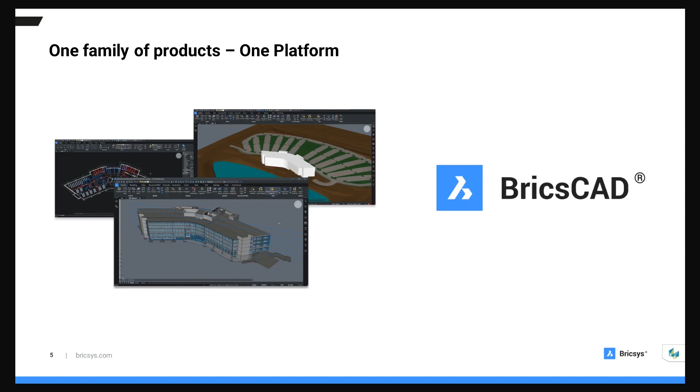Again, based on DWG CAD platform. So regardless of what you're using today, folks, if you're coming from 2D, 3D, maybe doing a bit of BIM, a bit of mechanical design, we've got it all. We cover all of the 2D, 3D, mechanical, and BIM in one application, and that's BricsCAD Ultimate. That's what you get with a 30-day trial.

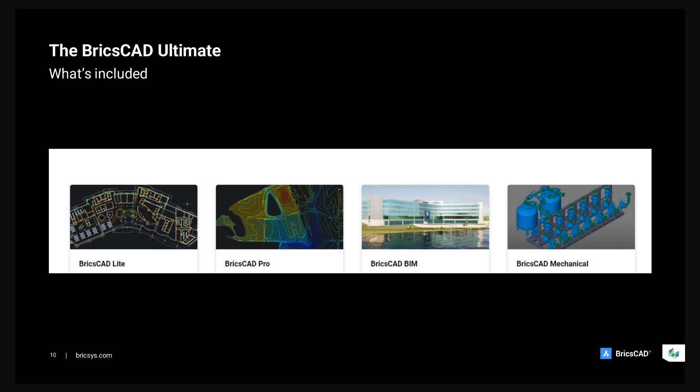So what does BricsCAD Ultimate look like? Now, BricsCAD Ultimate is affordable. If you just look at a low entry, always up-to-date subscription price, it's just over £1,000 for BricsCAD Ultimate. If you would like to own your license, buy once and own it forever, it's just shy of £1,900. And again, both of these, we do support network, multi-user, volume, or single user options as well.

As a side note, if you're a developer or work in education, we want to hear from you. Let us know, request more information, because for you it's free. So do reach out. Now, these prices are great, but...

And they had 20 seats of AutoCAD just to do 2D drawings, 5 seats of a 3D CAD application. It was a mixture of SolidWorks and Inventor - don't ask me why, I've never seen them two sitting in the same business, but they're just different departments. Well, they're using BricsCAD Ultimate now.

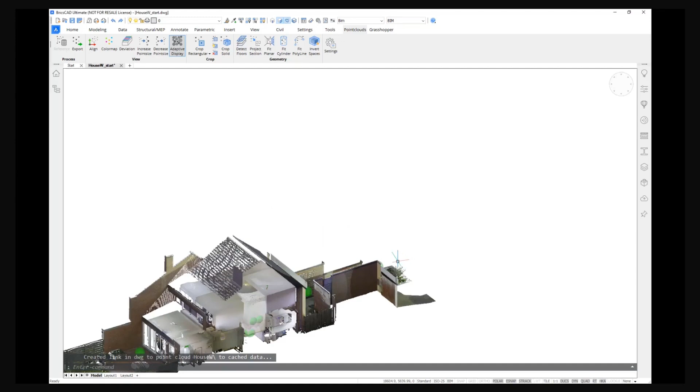Inserting is just like inserting an XREF, and then you can see that the image immediately disappears. As I zoom, less pixels are rendered while zooming, and when I'm zoomed in, more pixels are rendered on screen. We always have a fixed amount of pixels on screen so that you can quickly process even large point clouds.

Then we can see some features, which is increasing the points so that they are better visible, maybe coloring them to the elevation, or maybe resetting the colors.

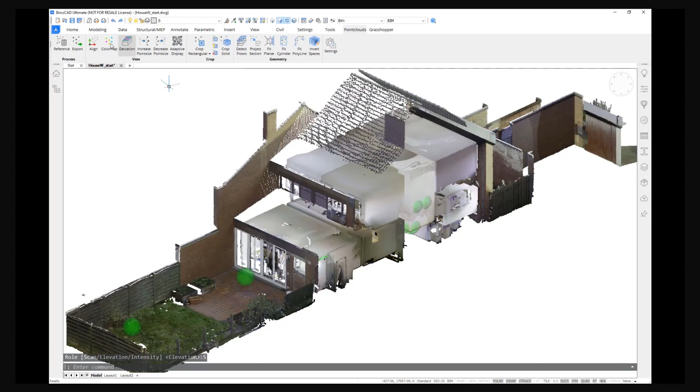to the scan. And then we can also go and align the point cloud. For this, we will be redirected to a top view, because it's needed to select a rectangle in top view. And here you will see that the point cloud is still rotated. If I align the point cloud based on a selection that contains a lot of XY aligned walls, you will see that the point cloud aligns itself, which is better to work with afterwards.

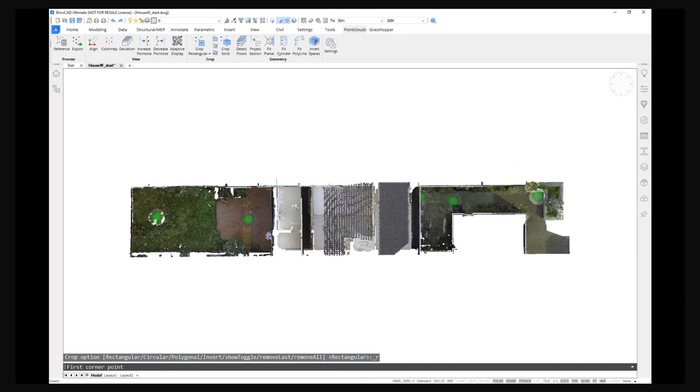Then we can also crop the point cloud, either with crop solids or with just our regular crop tool, and then we can leave, for example, only the inside visible or only the outside.

So what I want to show you as well is detect floors. Detect floors will detect all the floors in a point cloud, and here it found 2 floors, and now I can quickly clip through them just below the ceilings.

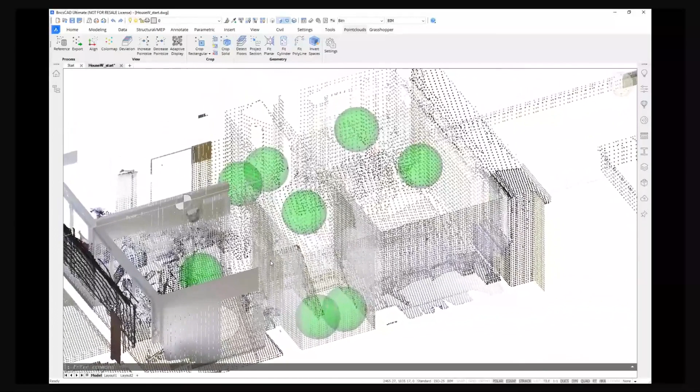And then especially in BricsCAD BIM, we have a feature which is the bubble views. If you have a structured point cloud, you can open the bubble views - those are the green bubbles. If you don't want to display that, you can change it in the properties of your point cloud. But here, if I double click on a bubble view, you will see the scan position from where the scan was made.

And from here we can launch Fit Planar. Note that the Fit Planar is a command special to BricsCAD, and it allows detecting walls by finding a plane of common points inside your drawing.

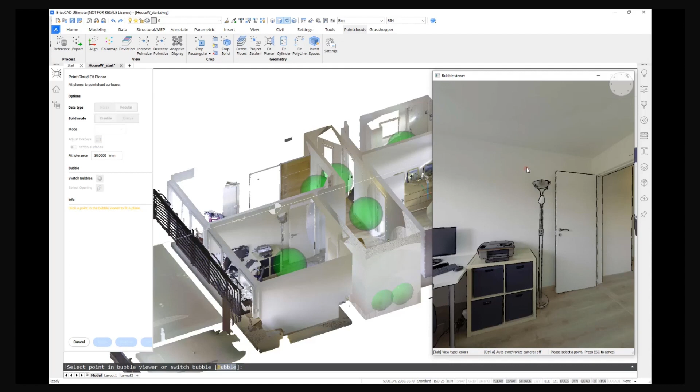And you can do this if you launch it from Bubble View. You are expected to pick a point in Bubble View, and you can, for example, pick the ceiling, or maybe not the ceiling, but here the wall. Then you will see that a plane is immediately created, corresponding to have as few outliers as possible.

So that's one thing, but if you now hold down shift, you can quickly trace over the entire room. By holding down shift, you are actually stitching all the surfaces in the room together - well, not stitching exactly, but making sure that they are nicely connected.

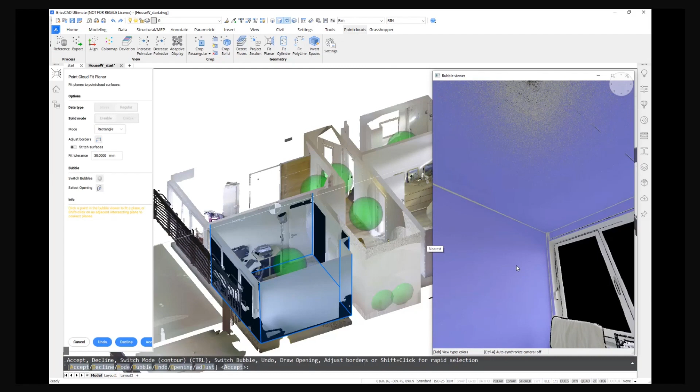And as soon as I have all the faces of the room selected, I can select the opening still. So here we can detect a rectangle that will denote the opening in the point cloud. So you see that here a rectangle was made, and we can do the same for the other side, like that.

And then you can either choose to stitch the surfaces or not. Stitching the surfaces will make sure that they come into one big solid. If you don't stitch them, don't worry, we can do that later, as I will show you now.

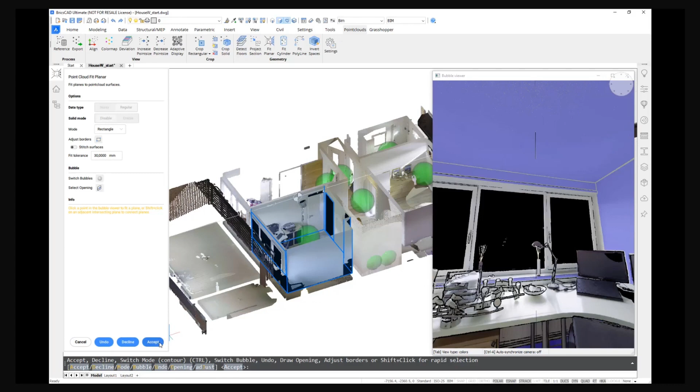But for now, just accept the defaults, and you see that now if I hide the point clouds - so I can cancel the command and hide the point cloud - then we see that we created a room solid. Still, the color might need to change a bit so that it's better visible, and we also see the rectangles that were created.

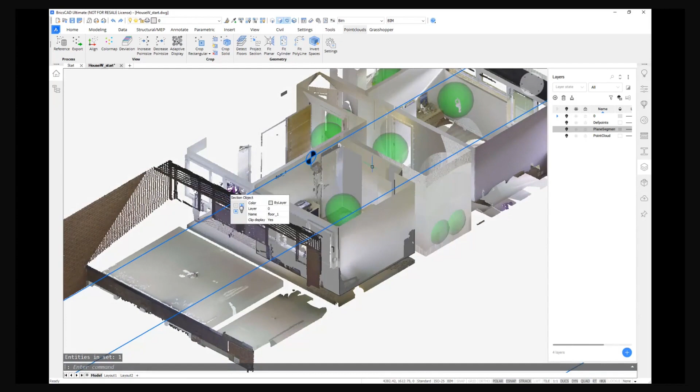If I don't crop my view, you see that the entire solid of the room is made as is. So the walls are also a bit slanted in this case. Then we can do the same for every room in the house.

Once we open the bubble view, we can launch Fit Planar again, and I can do the same for the next room. So maybe start with the ceiling in this one, then just go over all the walls that we see, and it will make a suggestion.

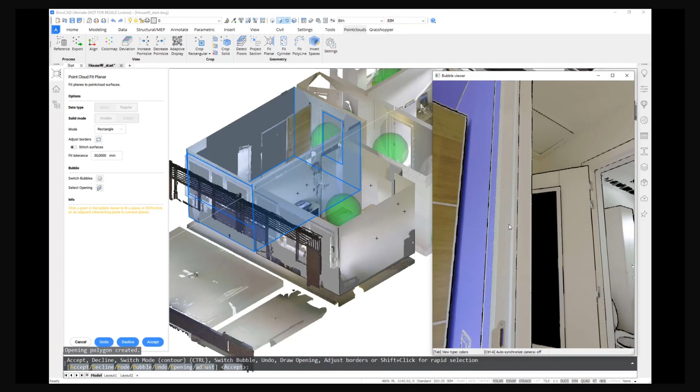Then detect the openings with select opening, and select the door opening still. Okay, and then I can accept and cancel the command, and now I will have 2 rooms.

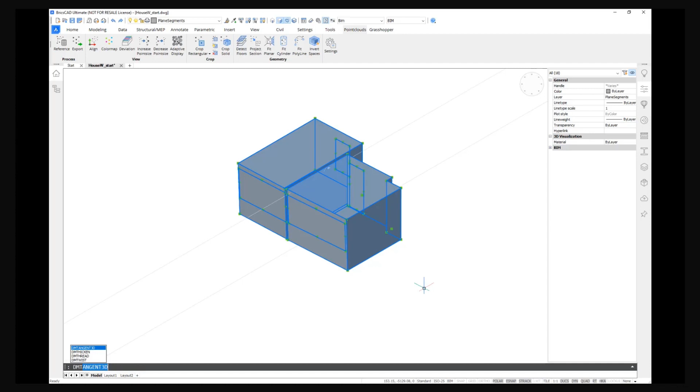As you can see, at the moment they are just faces or surfaces. If we want to stitch everything together, it's best to select all the surfaces and then just call the command dm stitch. Then you will see that now the rooms are actually turned into solid, so you cannot see through them again. So I like to do it at the end.

Now what we are going to do is skip to a model where all the rooms are made, so I will open the next file. Here you see the point cloud with all the walls modeled. But if we look closely, this is just the result from Fit Planar on every room separately.

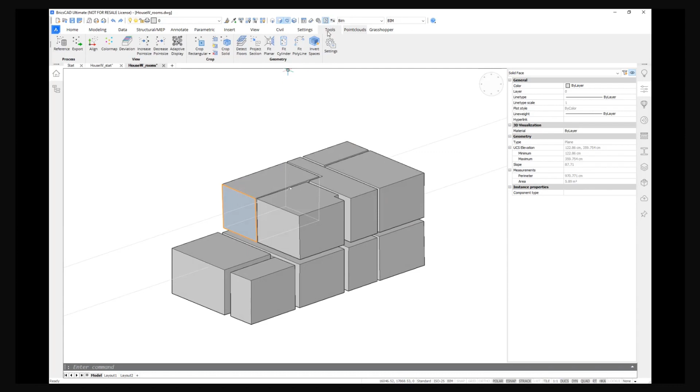If we look closely, we see that here the slopes aren't exactly 90 degrees, so here maybe it's 87.7 and so on. Now there is a command that can help you optimize this, and it's called just that: Optimize. It's a BricsCAD specific tool that will rectify your faces, or your 2D entities if you would do it on 2D entities.

It will rectify them based on the XY, YZ and XZ planes, depending on what you select here. It will make faces that are almost coplanar, and round off the values of the distances to a rounding precision of 1 millimeter. In this case, you can also select more.

You can also add a distance tolerance to determine when two faces are coplanar. Here I will make that only 50, so that our interior walls aren't mapped to one face, let's say. And the angle tolerance I'm going to put a bit higher, because we have quite some slanted roofs that I all want to rectify.

Then we can press preview and see how it's being rectified. If we're happy, we press OK. And now if I select the same face again, we see that it has a slope of exactly 90, and everything is nicely coplanar if you look at the nearest distance, for example.

So that's needed to be able to use the next command, which is back in the point cloud space: invert spaces. It's literally inverting the spaces so that it becomes the house geometry instead, so the walls and so on.

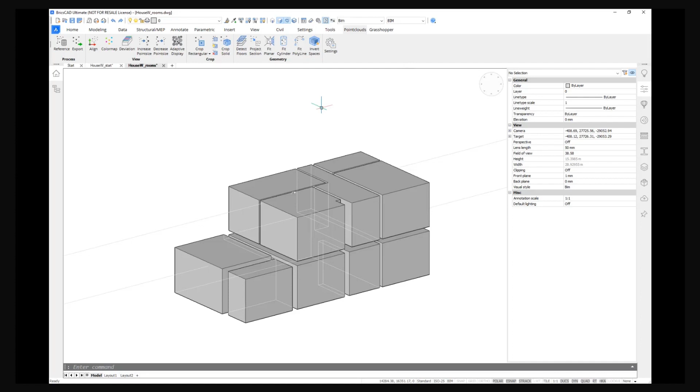And if we invert the spaces, we can also see some settings. I will leave most of them untouched. You can erase your input solids in this case, it's a bit easier so that you can immediately see the result.

And then here we can create a single wall shell, which makes sure that, and we can slice this single shell per floor and split it into separate pieces so that it becomes ready to use as a BIM model later on. So I will click apply, and here you will see the values, the thicknesses that weren't specified, just by having adjacent rooms.

So the outside shell, let's say, and then I will just press apply, and you will see what the algorithm does. It makes sure that the spaces are inverted and everything stays as you wish.

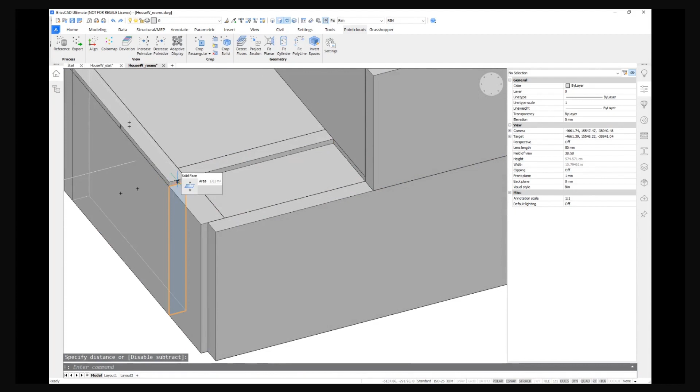So yeah, you might need to do some direct modeling to clean up this side, for example, and maybe do some more direct modeling with push-pull to make sure that it's more like an actual building would be built. So you can direct model as much as you want, but you can see that the elements are already nicely created.

Now note that normally invert spaces will also already give you the BIM properties, so it will already classify the slabs into slabs, the walls into walls, as you can see here. But for the sake of this demonstration, I will use an unclassified model and classify it from scratch a bit later on, because we also still had our rectangles that I can show again, here, the openings that we created before.

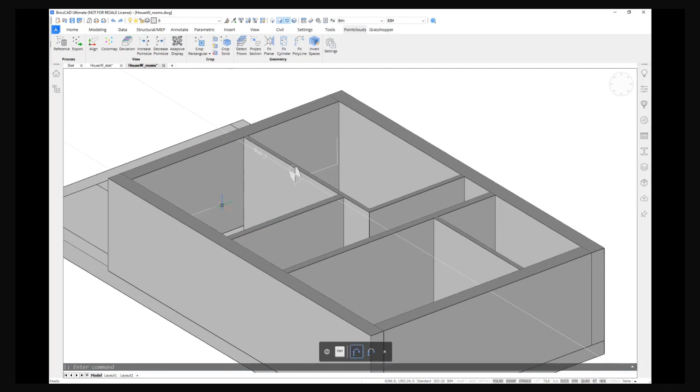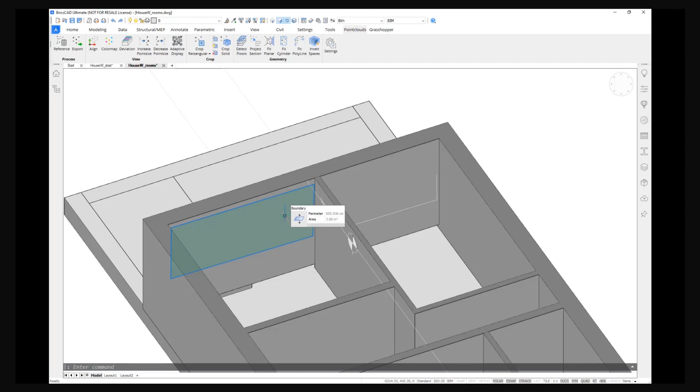Note that these will not be rectified together, so you will need to project them with the project geometry command onto the surfaces of the walls. You can use some perpendicular snap to quickly get the job done. I'll go from the corner of the rectangle to the perpendicular plane, and then you'll see I can highlight the boundary of this opening.

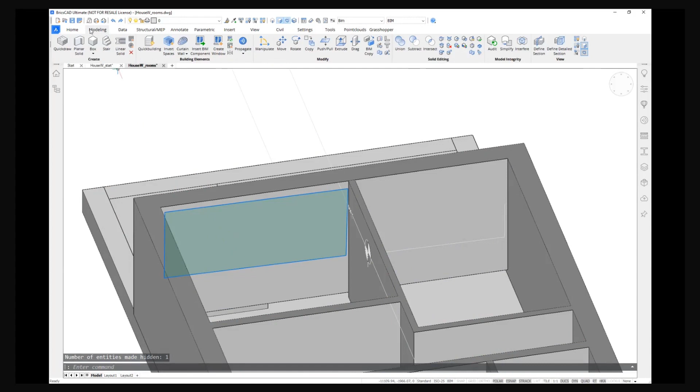Let's see how the window looked again. As I can see here in the point cloud, it has like 3 panels. So I will recreate that by using the tool called create window with the option style of 3 panels. Now I can still change the parameters to fit my design better.

For example, if we want a very small window - but here it was approximately like this, I think. So that's how we can trace over our components, and we can also insert some components like the doors from the component library.

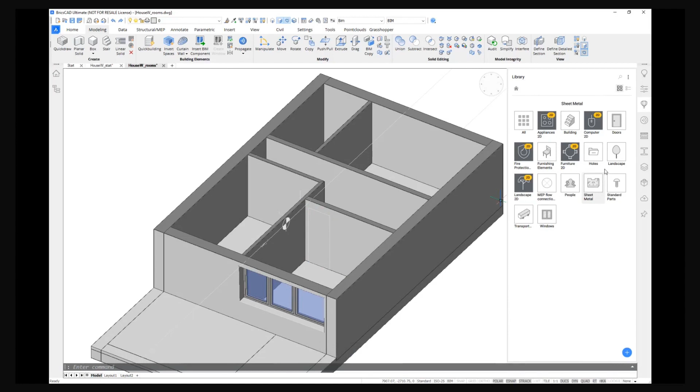We can base the parameters on our polyline. So here we can go to doors, insert the door, and then change the parameters so that it fits this frame nicely. We can then see what this distance is - it's 740 - and give this distance here in the width. Our width is already approximately what we want.

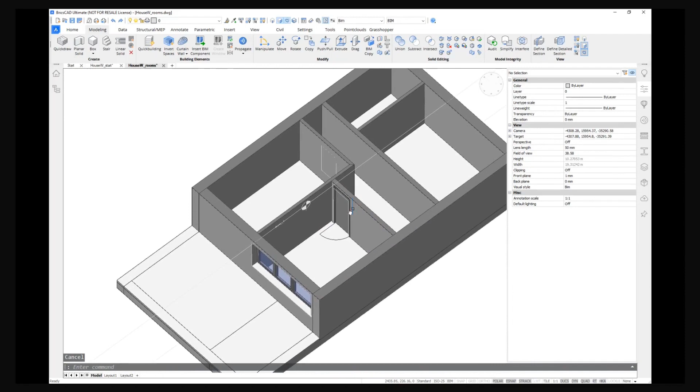As such, you can trace over your point cloud, doing this for all the openings you created. But we will not wait for that - we'll go further with the next prepared drawing, which has all these components already inserted. If you look closely and I hide the point cloud, you'll see all my doors, there's a stair. But maybe your classifications weren't correct right away, or maybe you added some extra geometry.

Now we are going to use Bimify. Bimify is a BricsCAD specific tool that allows you to convert dumb geometry into smart geometry, into BIM geometry. So that's where we will go.

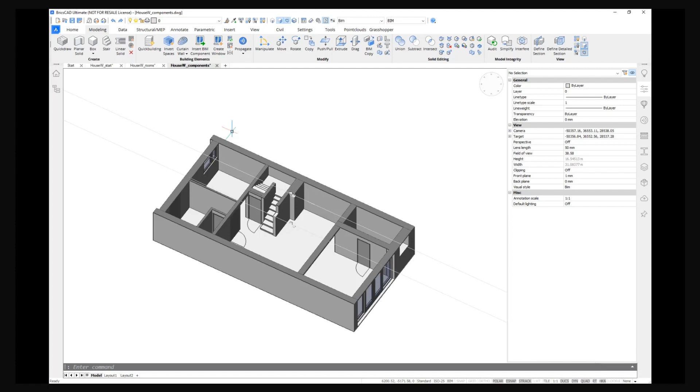Here we will also see that you can classify anything as anything in BricsCAD. You can, for example, first select these two solids already, the roof solids, and classify them as roofs - that's one way to go. Or you could do that after Bimify if Bimify made a mistake. But if you do it before Bimify, then Bimify will not overrule this.

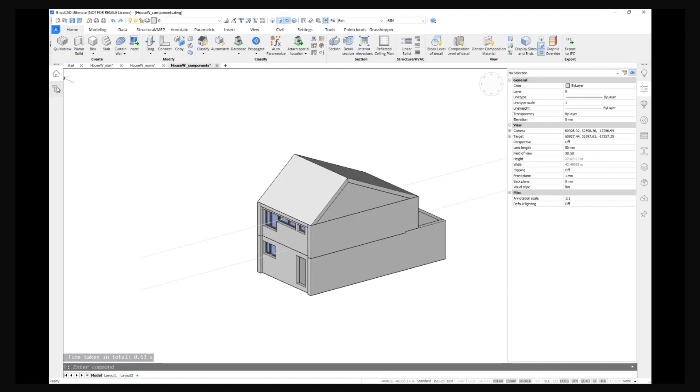That's very convenient. If I now launch Bimify, let me show my structure browser first so you believe me that they are just 3D solids, except the two roof panels which I already classified. If I now do Bimify, you'll see all the options. I will not create sections this time because I already have the sections I need. Then I apply everything, and here you will see that now we have all elements classified and assigned to spatial locations.

If we orbit a bit to the side, you'll see floor 0 looks pretty good, floor 1 also looks pretty good, floor 2 also looks pretty good. The roofs which we classified before are still roofs. If we look a bit more, we see the walls, we see the slab, we even see a beam - same for the lower levels.

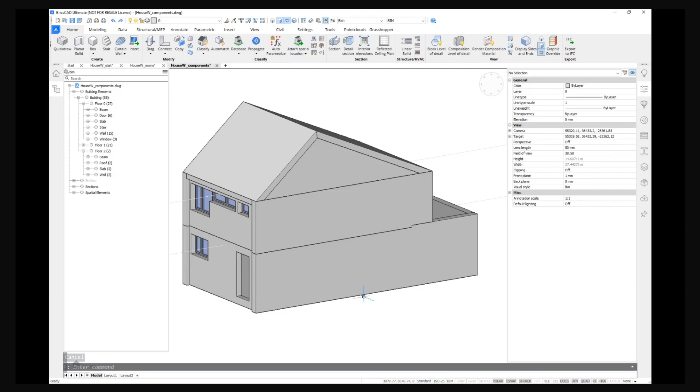We see the doors, we see the windows. Everything gets classified just from dumb geometry, just from block graphs and 3D solids. That's pretty nice, I hope you also enjoyed that. Then what we can do, of course, is check if all the properties are correct. We can also set some extra properties like the name.

We can easily define different grouping types in the structure browser. There I can, for example, select all my walls and give them the name wall, or you could specify the outer walls versus the inner walls, or give them a coding name depending on what you like.

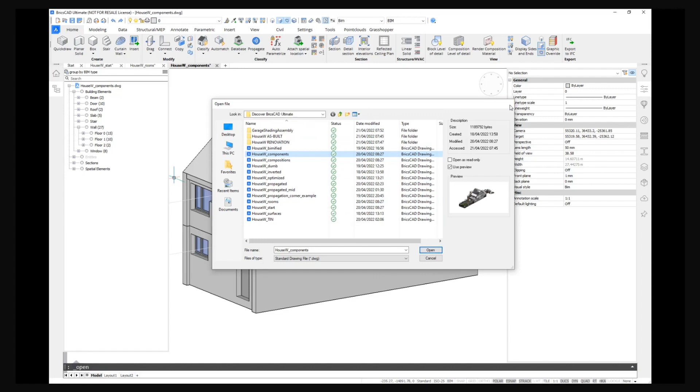Okay, then finally I already added some more information. Also what we can do is add some compositions. Here I can filter by composition, but if there is no composition, I filter by thickness of the walls. And here you see we have some 100mm walls, but also lots of different values that are almost 100mm.

So what we can do is define a composition. We open the composition dialog, choose for example the drywall, copy it to our project, and say that this one has 100mm thickness. We change some of the thicknesses of each layer, so for example you can change here to 75. And then we see that the entire thickness is now exactly 100.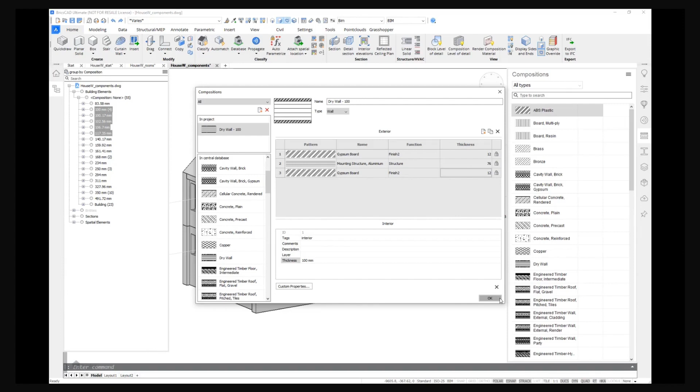What does it mean if all the locks are on? It means that your previous thickness will be matched to exactly 100, and normally the walls stay nicely connected if possible. So here, for example, this L connection will be maintained.

We can show you that by now going to only our compositions in our project and applying the drywall composition. You need to select the reference face from which it applies these compositions. Then you can see that the L connection is maintained as good as possible, but we might need to L connect once again to clean up the corner.

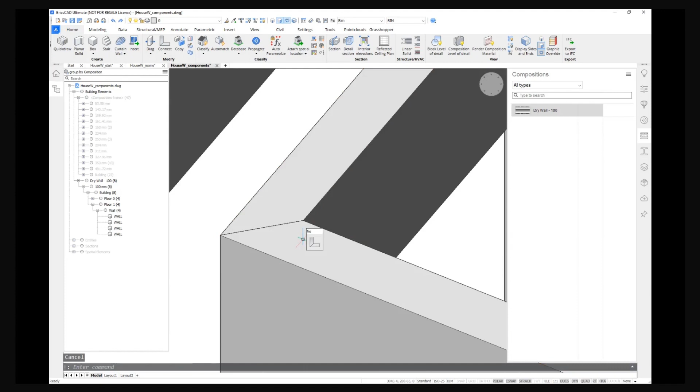Same here, so as such you can easily make sure that all your compositions are correct. It might not look like much, but actually we have here a composition attached. And if you look closely, if we put on the level of detail, we also have the different plies here, so that's very interesting.

We could use auto match to automatically—if you have one example of everything—make the entire drawing according to your compositions. But here I did it just by selecting the correct thicknesses from the structure browser and applying the composition I made to it, so that it becomes all clear and correct thicknesses.

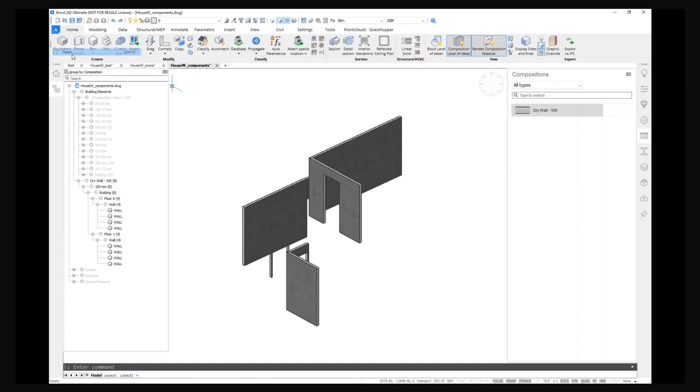And I did that in this drawing, so here we will see the entire drawing where some compositions have been made. And you will see that now not everything is looking as I would wish it. For example, if I look here, my level of detail isn't that great yet because my bottom is not structurally sound. My structural element is not connected to my concrete slab.

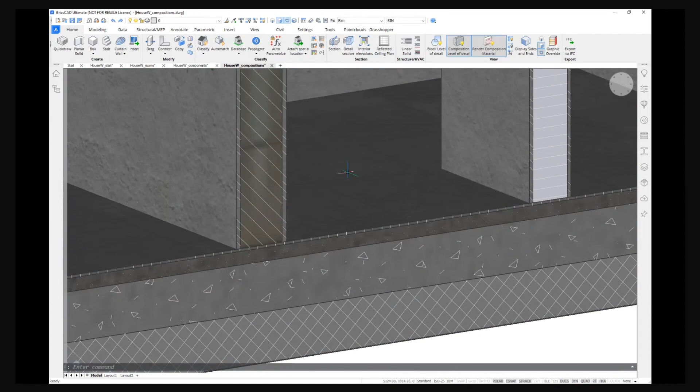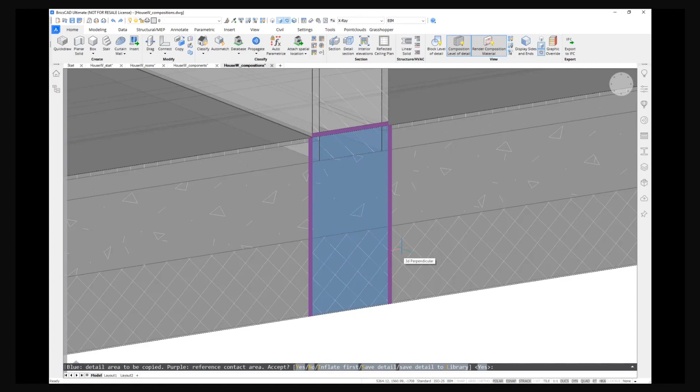So I can still change that. If composition level of detail is on, you can push-pull certain layers, and then we can propagate this element to different locations. So I select both solids, and then I select no base solid for now. Then I see, okay, these two walls will be propagated, or this connection will be propagated to other locations where exactly this type of wall and exactly this type of slab is also found.

And as you will see now, it's not in that many locations—we can see it's just in a few locations of the same wall, basically. So you could accept this, but I will cancel it because we have a far more interesting element, which is the details panel. In the details panel, you can actually store your details. So while you did propagate, you also had the option to save your detail to the library. That's what I did, and then you will find a similar connection here—the wall slab connection.

And then here you will see that I have this inner wall, and then I can click Parameterize to parameterize this detail. Then actually everything will be parameterized, and the entire detail will be mappable to locations with exactly the same amount of plies in their compositions, but with varying thicknesses of the plies. So the only prerequisite of finding a similar location is the amount of plies.

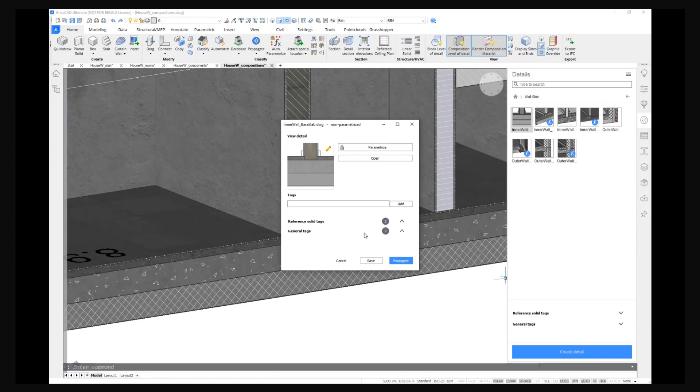Material thickness of the ply doesn't really matter. And if we have parameterized it, it's just like this one here. You can see that we have some tolerances. The angular tolerance is how tilted the wall can be. The thickness tolerance is how thick of a varying thickness we can map it onto.

And then let's just see it in action. So first of all, note that here none of the walls have been done yet. Then I can just drag and drop my detail in there and it will calculate for me all the locations. So maybe I don't want it at these locations here.

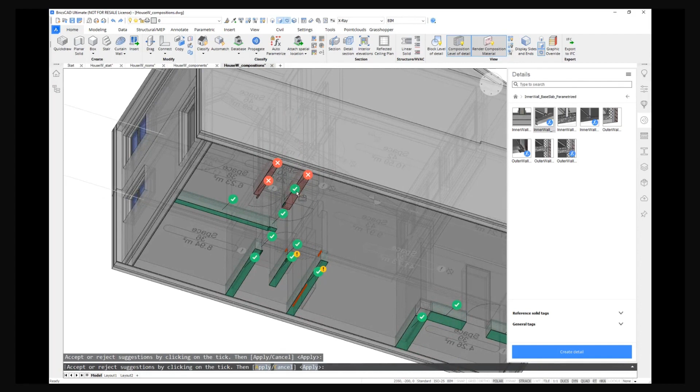I don't want it here at my toilet, but I want it in all the other rooms. So I say apply and let's see what happens.

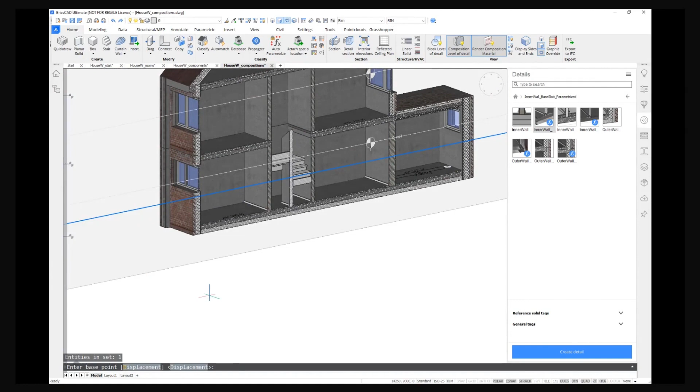The detail was applied to every other location. Note that we also had some extra details in this parameterized detail, which also has baseboards. So as such, you can easily propagate baseboards all the way into your entire drawing, and you see that here was also made. But if we look and move our section a bit, we'll see that in the area of the toilet, the details were not applied.

That's super great. Now it's time to show you the final BIM model result. It's an as-built model where I've also attached a TIN surface for the front garden. I can show it to you in the attachments panel.

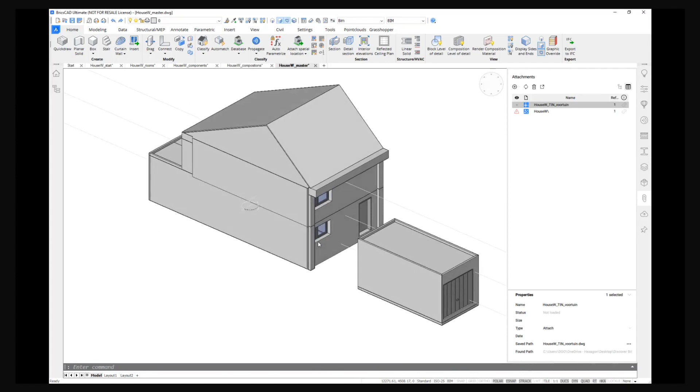This is the entire model with the garage also modeled. Then I can hide my point cloud. You see the model is very nicely detailed. Also, if we look through the cut-through section, all our details are modeled as I would wish them. There are baseboards everywhere, and everything is classified nicely. So we're very happy at this point.

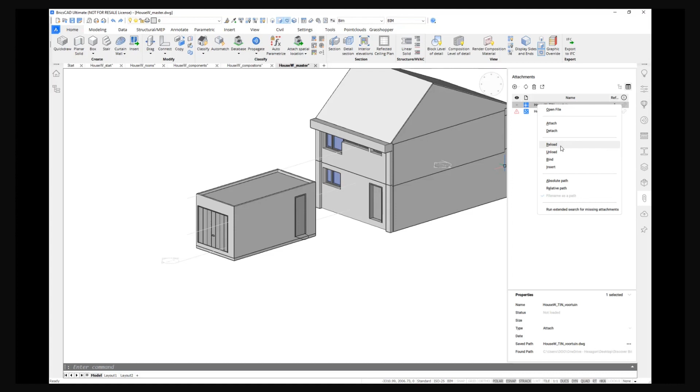I just want to show you that you can also use civil surfaces, so TIN surfaces from BricsCAD Pro, in BIM models. So you can reload, and then you can see that the TIN surface is now attached.

It's a bit faint, but that's a setting. Here you can see even the pavement is visible in the TIN surface, so it gives you an idea of how the surface terrain is going outside.

To make the sections, it's best to unload your TIN surface, otherwise it might take a little bit of time.

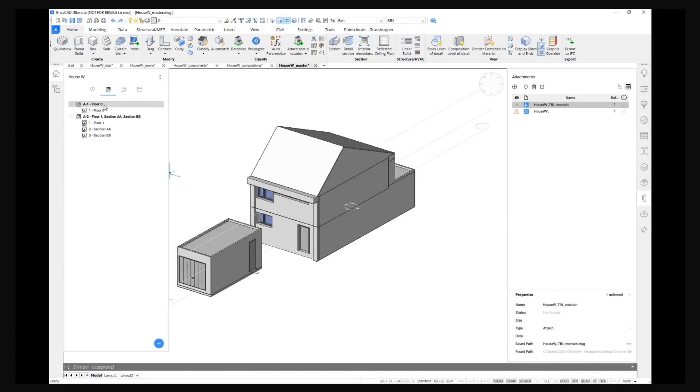So here we have now a BIM project really with some information such as our company logo, our project name, and so on. We have, of course, some sheets. These sheets correspond with the section objects that I have in my drawing. And then we see all the sections and all the files that are in our project.

So let us open a sheet. Then you can see that I also used point cloud project section to give a nicer infilling of my room based on my point cloud. The point cloud gets turned into a raster image from that section plane, and it allows you to see, for example, where the furniture is placed, even though I didn't even model the furniture. Then we can also open a cross section here.

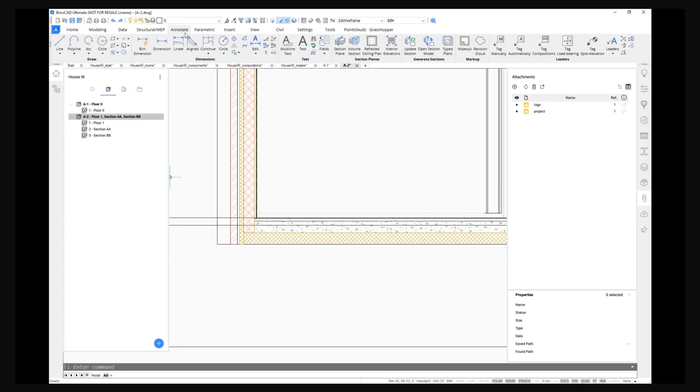So here we have our cross section with nice details. We can, of course, annotate some things such as the tag composition. You can tag a composition here - that's one element, that's the facing bricks.

But you can also say, okay, we need the entire thing, because this is just the pillar at the end, which only exists out of facing bricks, but here our entire layout of our wall is given, maybe also from our floor. Maybe do some spot elevations on the stair.

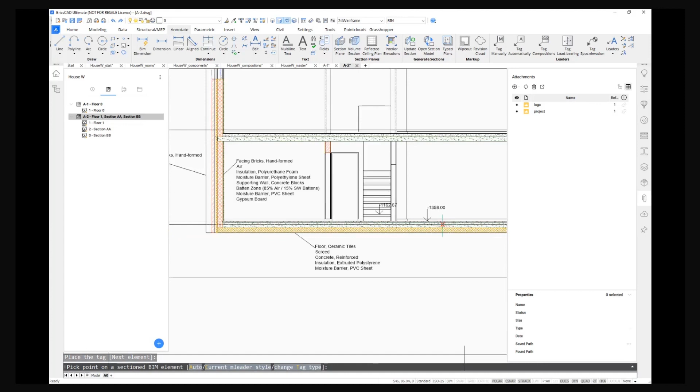So we say, okay, this one is that high, but maybe also here we see the spot elevation of the outside, and here of the floor.

You can of course also dimension some things, such as the height of the beam, or all your walls and so on. We also have a new command, BIM Dimension, which is possible to use on top of our generated sections.

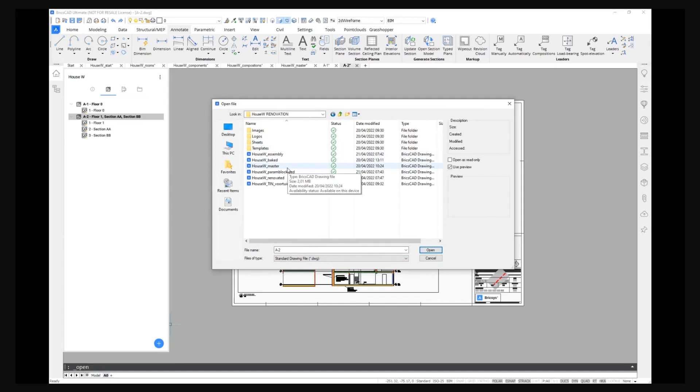Okay, so that is our scan to BIM, but now our renovation part still. We want to open our master file once again, but I just made a copy so I can do some renovation work in here. Basically, I want to renovate this garage shed in the front.

So I delete or put these elements on the status. You can put them on the status demolish, for example, to make sure that these components are going to be demolished. But for now, let's keep it simple and just delete the elements, or maybe just the components, so that we can see the wall still.

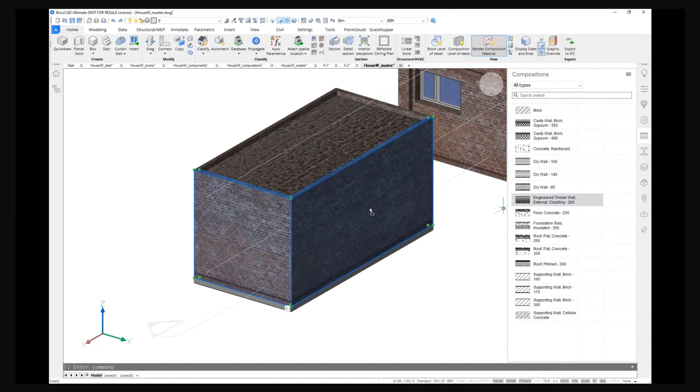So now we have just a plain single layer brick wall, if you turn on the compositions. But we can also make sure that it's a new composition, such as the engineered wall, so a wooden frame wall. And then we can see how it would look.

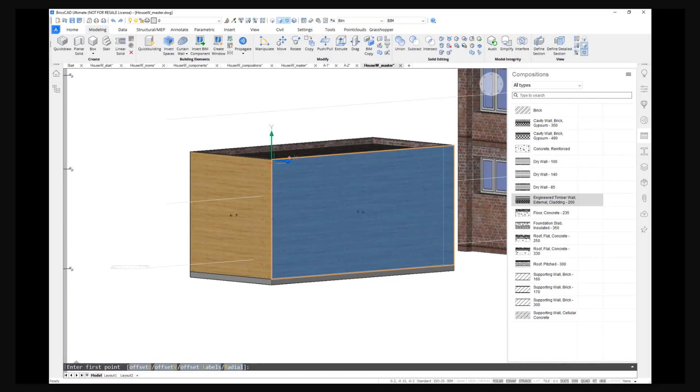We can maybe design some BIM grids just for you to see. So I will start here. I will say 0.5 onto 0.8 maybe. Okay, and then I have my grid. Then we can move this block a little bit.

And then I can make a window out of this grid, and I can delete the grid afterwards, so that it becomes nicely a nice model.

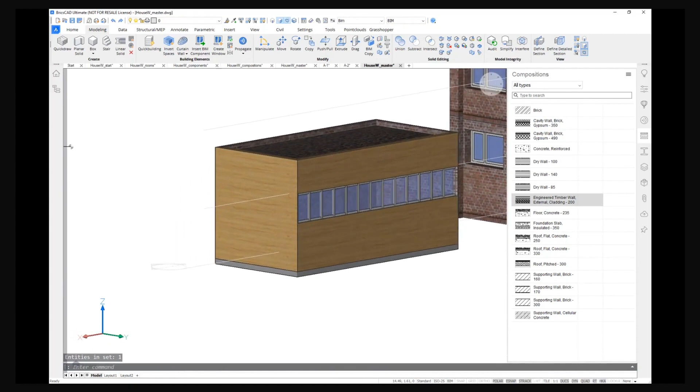And here for the garage door, I have a very special request. I want to have a special garage door, which is also going to make a shading. And for this, I will turn to my renovated house, where I already prepared this.

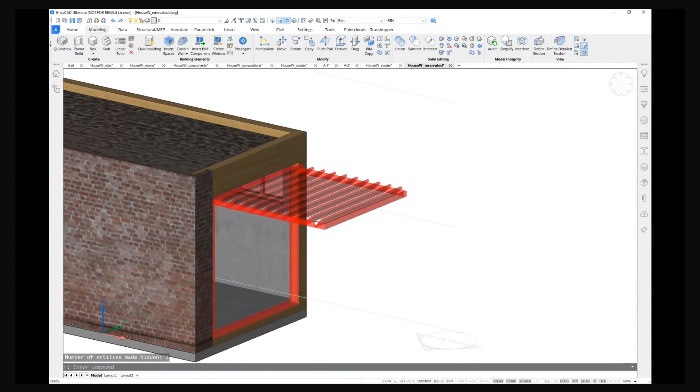So you will be able to see what I mean in just a bit. So here we have actually attached a Grasshopper file to a 3D solid. I can hide the point cloud, and then you see actually what type of garage door I want. I want a garage door which has these shading elements that also turn into the garage door panels. And we can change this entire thing, because it's now just a Grasshopper script.

If you have the Grasshopper plugin, you can also clear the data, and then it will turn back into a regular geometry. But if I attach the Grasshopper script again, then you will see how it looks if I close the entire door, and then you can still rotate, for example, only your panels 45 degrees, or maybe the entire shading 90 degrees.

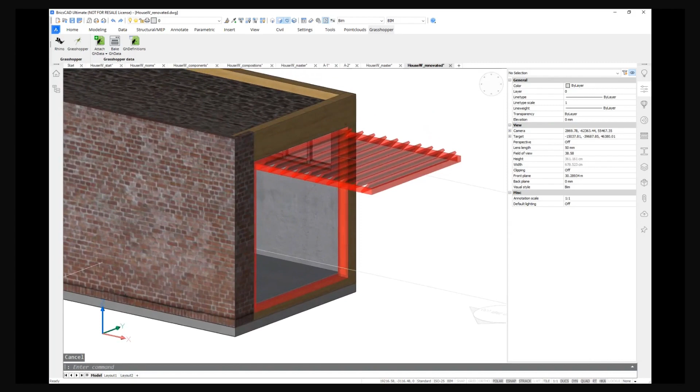And this is like the type of garage door I imagine, just a pre-design very roughly. But now we want to fabricate this, of course, because this is an ultimate webinar.

So we are going to do design to fabrication. How am I going to do that? Well, I can bake these Grasshopper elements, and I can actually just start off from there. So I can clear the Grasshopper data on this element so that we only see our baked elements.

So this is my pre-design. I hope you also agree that it looks kind of fancy. I will want that as a garage door.

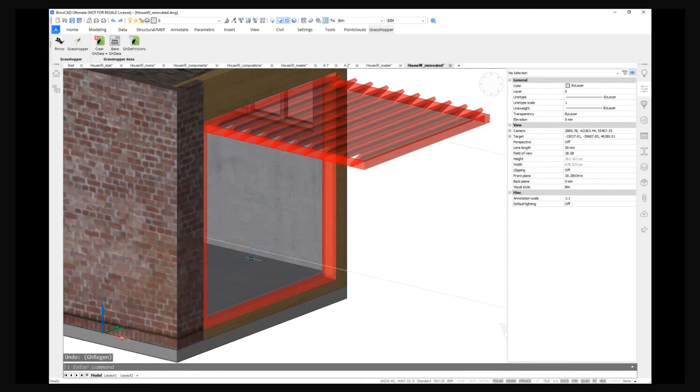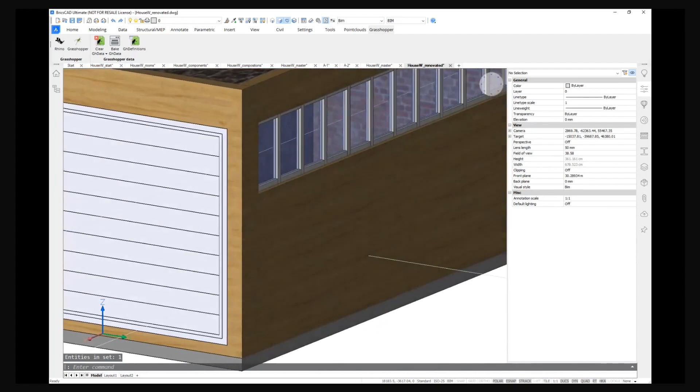And then what I can do is, maybe it's better if I bake it also when it's closed, of course. Then it will be a bit easier to model with. So I just undid a few steps. I'm going to bake everything and then clear the Grasshopper data from this element and delete that element. Yes, and then I see my garage door, which is closed, which will be a bit easier to work off.

But note that if we classified elements into our Grasshopper script, this will also become here the correct classification type, and you can define this into your Grasshopper script. So for example, here the framings I made members. So yeah, that's a cool trick from Grasshopper.

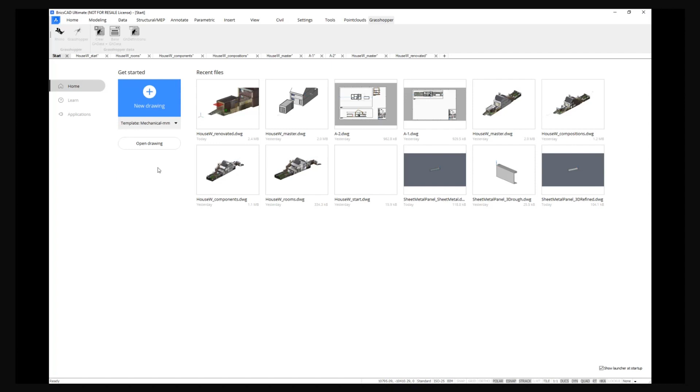But here, let us take this assembly and just copy it to a new drawing. So let's start in a mechanical template now. Oops, that was the default template. Mechanical, yes. All right, let me just change my background.

Okay, so we have here a new drawing, and I can copy paste my block there. Now it's maybe better to move it so that this becomes our 0, 0, 0 point.

Yes, and then we can actually start by transforming this into an assembly. So how will I do that? Well, it's actually quite simple. First of all, I will delete the repeated panels.

Then, you could also use parametric blockify for this, to find all the parametric blocks and define them all into one type of block. But here I choose to just start off from the bottom beam and then block everything.

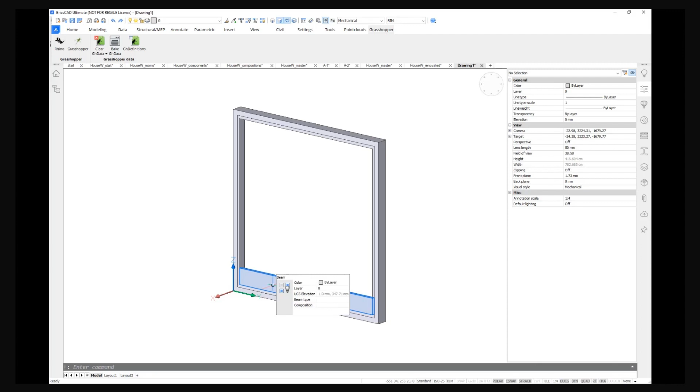But first, let me change this so that I can parameterize this entire beam. So first I will switch to the mechanical space, and then, as you can see, nothing is parameterized right now. But if I go to auto parameterize, you will see that these elements get parameterized.

We can delete the fixed constraints for now. And then we can see that we can actually animate this length, for example. So now it became parametric.

We can then BM form this or just block it. If you block it, it will become a parametric block. If you BM form it, it will become a component. So we can actually say that this is the panel.

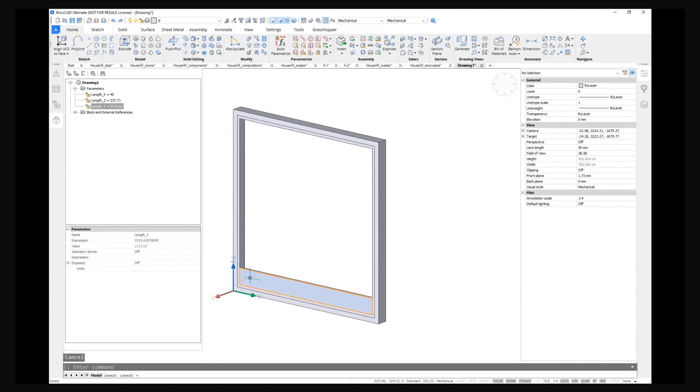And then here we can say that this is a block reference. So this is not an assembly yet because it's just a block reference, and assemblies need components with a little bit more information, but we will see how we can turn blocks into components later on.

So here I will do the same. I will auto parameterize, delete the fixed constraints, block it to inner frame, pick on screen. Yes, so we now have here a block reference again, and I will do the same for the last frame, the outer frame.

Okay, and then I will block it to outer frame. Now I have something which is not yet an assembly, it's just some block references. How do I make an assembly out of it?

Well, very easy. You go to Assembly and say Initialize Mechanical Structure. If you have a drawing with blocks and blocks and blocks, it will initialize a mechanical structure right from it, converting all the blocks into components. You see this little icon change, and now we have a component with extra data attached.

Then we can link all the parameters so they are controllable from the outer element. So now we can say length X. You can see what changes here. And then finally, you can have an assembly that's entirely parameterized.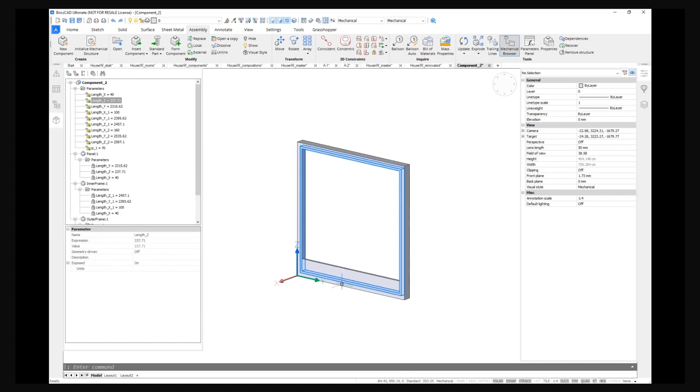But that's not enough for me. I just want to create this. Of course, you could array this block upwards first, but I didn't do this now. That's just a matter of an array command.

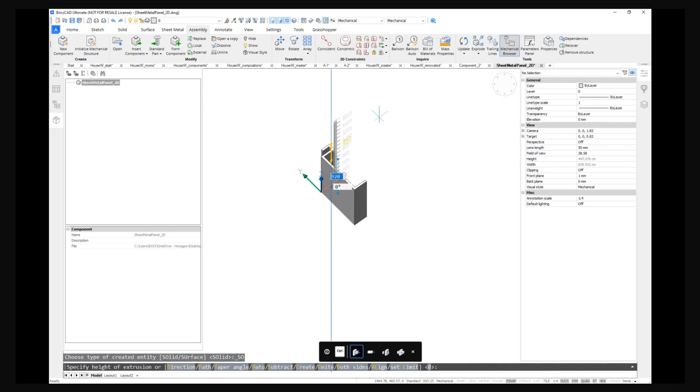But before I do that, I'll show you that I can also turn this panel into a sheet metal panel. For that, I'll start from a 2D drawing this time. So here I will say the 2D drawing, and then I can very quickly extrude my polyline so it becomes a beam, and then from here turn that into sheet metal.

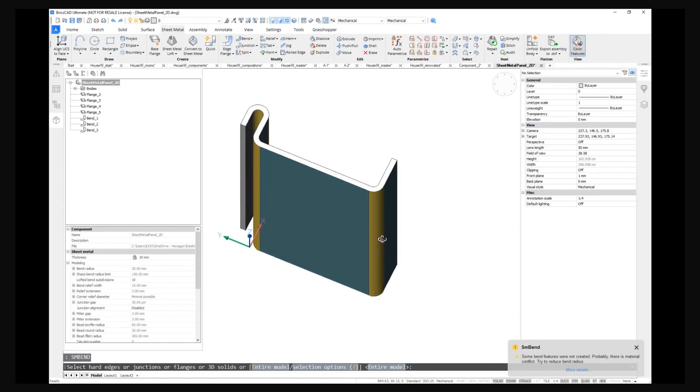It's very easy. You convert to sheet metal your flat element, say entire model, and then my entire model is now sheet metal, but it's not really fabricatable yet as it doesn't have bends. But that's also very easy - you say create bends on entire model, and we have all the bends that we need.

Let me switch to where I also have a 3D model of something which is almost sheet metal, but not quite yet because it doesn't have this blue color. You can also convert something already entirely fabricatable, maybe made in another program, imported through STL, whatever - you can turn it into sheet metal in BricsCAD.

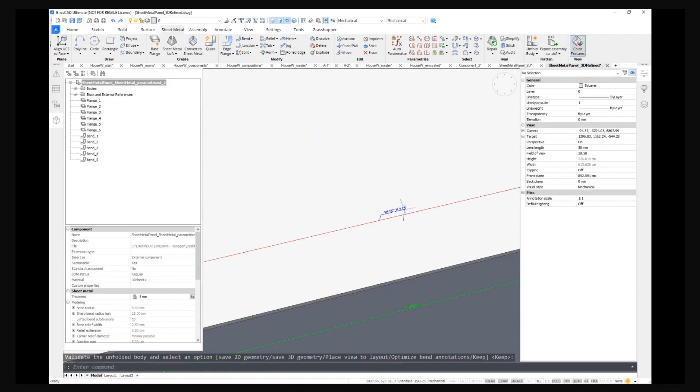And the power of sheet metal in BricsCAD is that you can unfold your body. You can make an unfolding very, very easily, and then see how that turns out with all the bend radiuses applied and so on.

And then finally, I added some extra elements here - I added these holes, but as you can see, I also added something else: parameters. You can also do this, but you'll probably need to add some extra manual constraints.

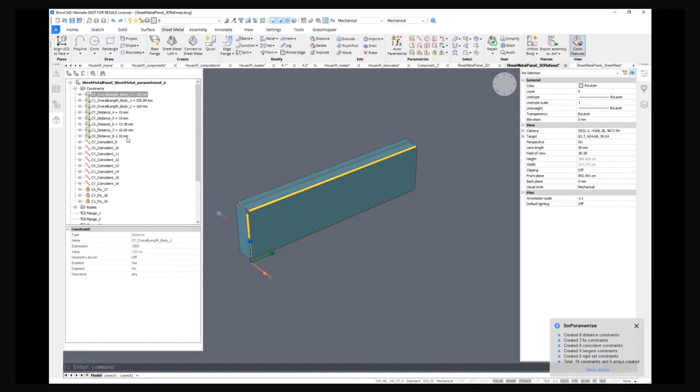If you go to the Sheet Metal tab, you have Sheet Metal Parameterize on the entire model, and then you can see that we can control the overall length very easily, because the entire sheet metal part is parameterized right now. Maybe you'll need extra constraint placement for complicated parts, but in general this gives a good base for you.

And then we can have something like this where we can animate the entire length, the entire height of the elements - our holes move along. We can animate the thickness. And why is this so important?

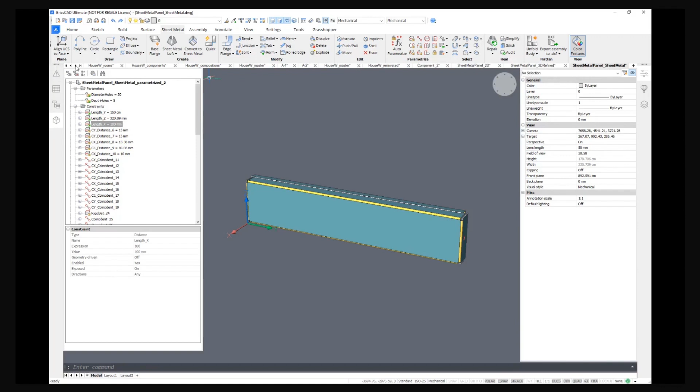Well, at this point, if I can actually replace my assembly with... so I will open this assembly, so I can have my assembly, and I can replace this.

That was not the one we were working on before, but let me initialize the mechanical structure here once again. So here we have all the panels again with all the parameters, so we can link to parameters once again. And then we can replace from a file - we can replace from the sheet metal part we just created.

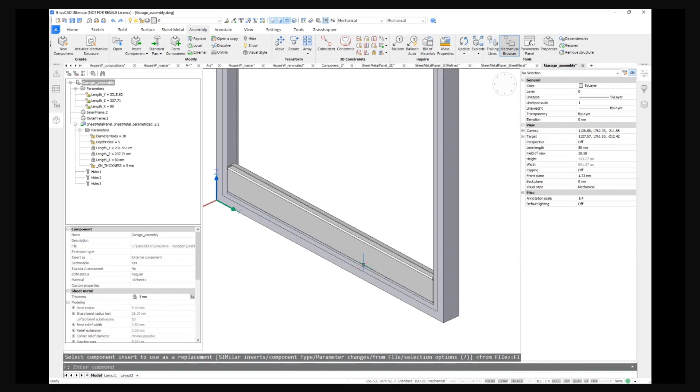And then you see that all the parameters, although my sheet metal part was way shorter, will be applied and reapplied. It will look as I desire.

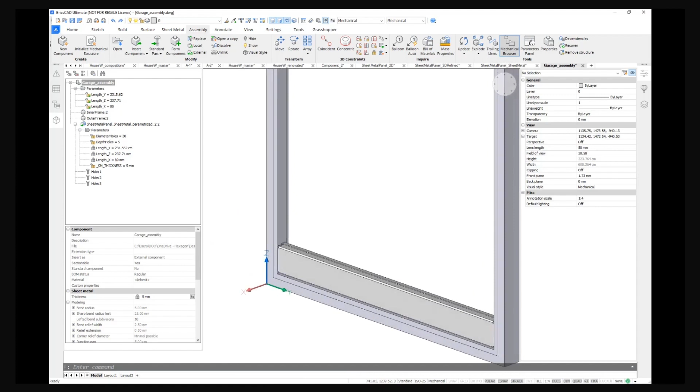And then finally, as I said, we can array this first panel upwards. And if you put a bit more effort into it, you can even make an entire parametric assembly. With this parametric assembly, you can make bill of materials, make layouts from it, and I'll show you the result now.

So here you can see that we can also change the amount of panels, but later we will see this in action in our BIM model, because that's of course the final step - return this component, this mechanical assembly, to our sheet metal part. But first, let's see how the layouts were created for this file.

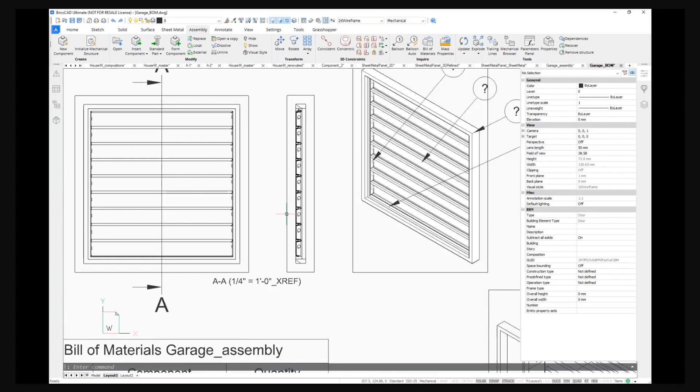So here we have a small bill of materials with every component annotated. We have a front view, side view, cut-through section view, then some exploded views. We have some annotation bubbles that apparently lost their icon here.

So maybe we can reapply the balloons. We select this viewport and our number bubbles, and then they are back on their spots. So easy as that, you can annotate your mechanical drawings.

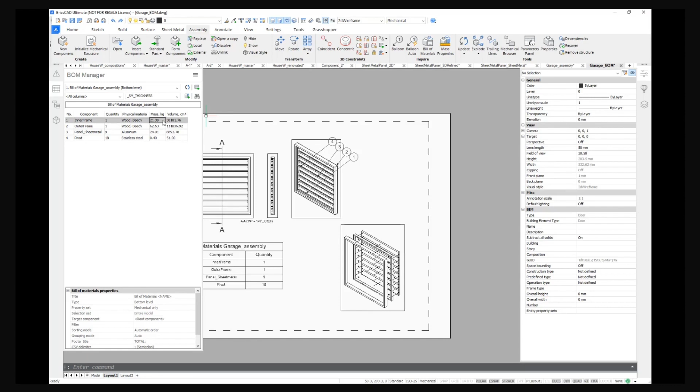You can also find a bill of materials here, where we can go to a bottom level where we see everything, just up until the mass of the inner frame, the outer frame, the materials of the inner frame, the volumes, everything you need to know, and add it into your assembly drawing.

And then finally, let's go back to our renovated model. We can stay in the mechanical workspace or go back to the BIM workspace. And then with the command BM Insert, you can now insert the final garage door. Yes, and then we can place it as such.

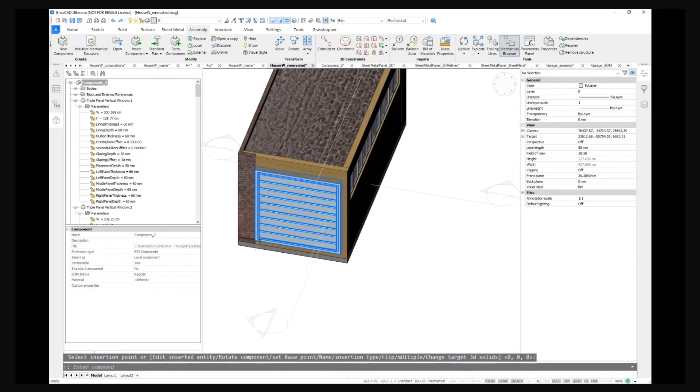Okay, and then we now have our final component, which is fully parametric, where we can give, for example, only 8 panels, or change the lengths and so on.

Okay, so that concludes the entire webinar. You can, of course, also make some extra type plans for your renovated building. And then finally, I will hand it back over to Jess for the Q&A. So feel free to shoot your questions.

Excellent. Thanks, Flo. What a fabulous demonstration. I don't know about you folks, but I want to know where you can get that garage door. I kind of like it. I really do. I did say it was going to be a jam-packed session on the demo, hence why I kept my bit short. And as promised, I'll continue to keep my bit short.

We'll move straight to the customer stories. Customers, folks who have taken advantage of BricsCAD Ultimate. The first one I want to talk about is Bastiaan van der Steen, who's a very busy, versatile entrepreneur in the real estate world. He's involved in so much more than just buying and selling properties.

The company IQTA is developing multiple projects based on system construction, like temporary housing using high quality design containers. They're based in the Netherlands, and they're using BricsCAD Ultimate, enjoying the BricsCAD package with BIM and the mechanical functionality, exactly what Fleur demonstrated, that all-in-one CAD solution to support system construction and regular project development.

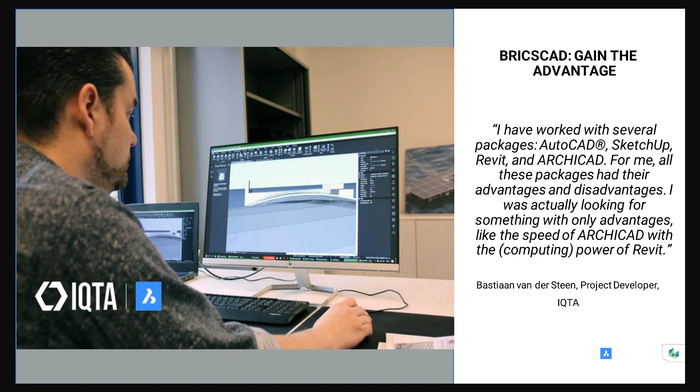Again, this is a great story, and we see this more and more. Folks who've got different versions, different applications of 2D, of also different applications of 3D, and they might even have some BIM, they might even have collections. Really check out BricsCAD Ultimate. I kid you not, you'll be amazed.

Prototype. Let's talk about Prototype. Again, based in Bulgaria, with 85 engineers. They work alongside architects to create the facades for some incredible buildings around the world, like the Gasholder triplets in King's Cross in London, UK, the Largo Sofia in Bulgaria, and of course the city center building in the USA, Miami.

And a great message from the director there. They really do like the fact that BricsCAD gives his team the power to do 2D, 3D, mechanical design, and BIM in one CAD system, that all-in-one CAD solution that offers flexible licensing. It's what we've been saying, folks. With BricsCAD Ultimate, that's what it's all about.

But there you are, folks. On behalf of the BricsCAD team, we bid you farewell. It's been a great journey. The whole point of this webinar series was to unwrap BricsCAD. We have a lot of folks who use BricsCAD Lite for 2D, BricsCAD Pro for 3D, mechanical for advanced mechanical design, and BIM for building information modeling. We just want to show that with Ultimate, and with the whole series as well, you do get the one solution that bridges those gaps for 2D, 3D, mechanical, and BIM.